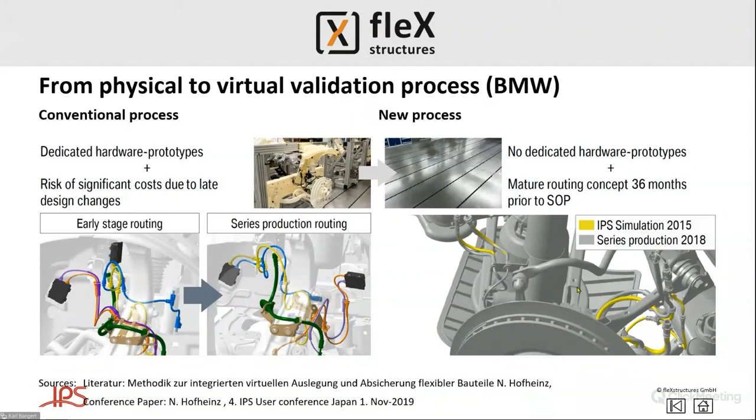So 3 years before start of production, they can already determine where the cables are going to lay out, check for bending radii, clearances, motion considerations, so that once you go to production, you have the confidence that this will be a design that can be manufactured, and also have minimized the risk of warranty costs, which is also a consideration. If you are joining us from the automotive industry, you probably already understand that we've gotten much more complex over the last decades in terms of the content of vehicles, both in software and wiring.

We now have many vehicles that have 5 or more kilometers of wires within the cars, and are looking for ways to reduce cost and weight for that. The major automotive OEMs, both in the US and Germany, are going all in for electric vehicles, for EVs, and the trend is continuing. So the challenge becomes, how do we manage this complex network of communication wires and high voltage power wires? How do we manage the transition to 48 volt systems, which are coming soon as well?

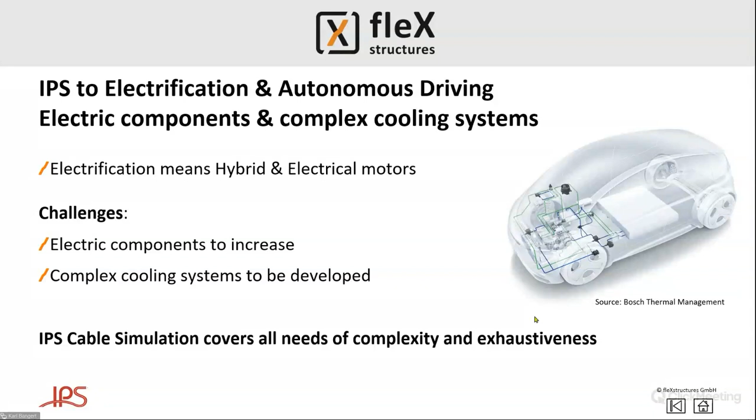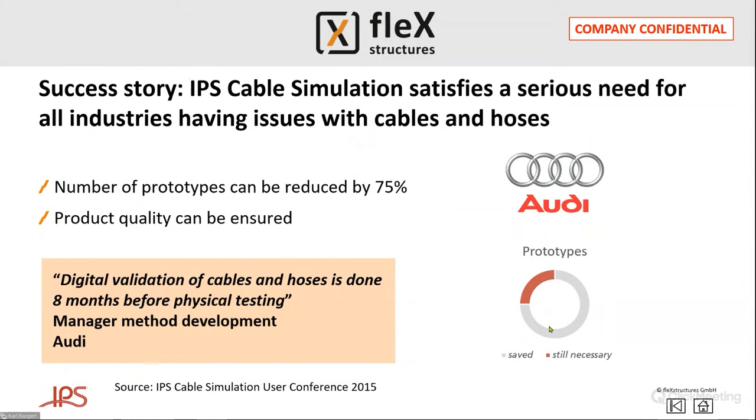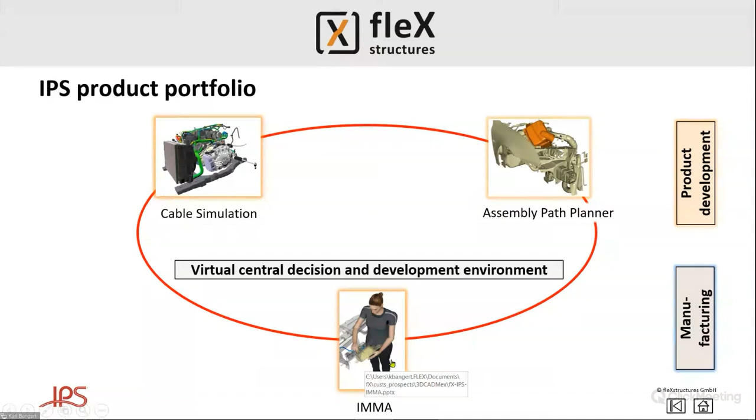In the future, Moises and 3D CAD Mexico, we'd like to continue a series of webinars where we talk about the other solutions in the IPS product portfolio, because we can also assist with assembly path generation, ergonomics and human factors, robotics and virtual paint and sealing, and then have these models available to you in virtual reality as well, so that you can truly understand what your design is capable of in the virtual space, whether it's on the screen or in a virtual environment. So we're going to discuss IPS cable simulation and present that.

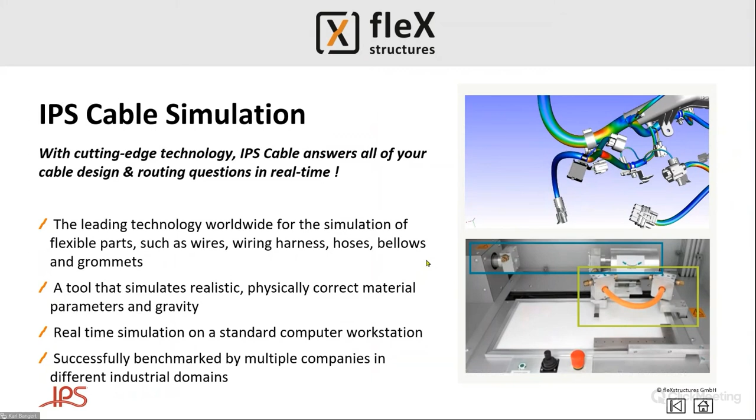So what you're seeing here are movies. These are real-time simulations. That is the important math that was developed 15 years ago and is constantly being improved by the teams in Germany and Sweden developing IPS. It is an engineering accurate solution. We also provide measurement test services so that you can test the bending and torsional stiffnesses of your wires, cables, and harnesses so that you have the confidence, the trust that the simulations that you see are physically accurate and meaningful, and that you can rely on this. In that way, we're doing two things, which is providing you a fast solution and one that's highly accurate.

So whether there are small motions of hoses and cables or sensors, or large motions, these type of things move very quickly and can be investigated very thoroughly with IPS cable simulation. So I will stop talking. This is what we're going to see.

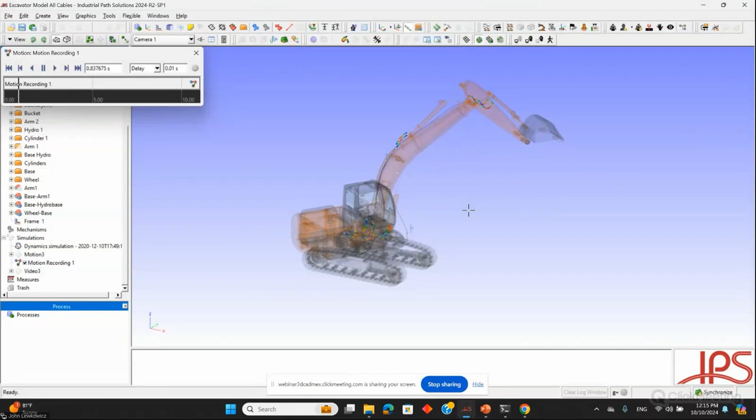So this is one example of what we can achieve in IPS cable simulation. We want to, long before start of production, determine the routings of all of our flexible components so that we can analyze them and optimize them to get the best design very early. So we want to understand the behavior of all of the flexibles in our product, how the product is operating or moving, and then we can investigate and change the flexibles to look at things like bending radii or forces within the flexibles or clearance to surrounding components. Whatever the need may be, we can investigate it in IPS.

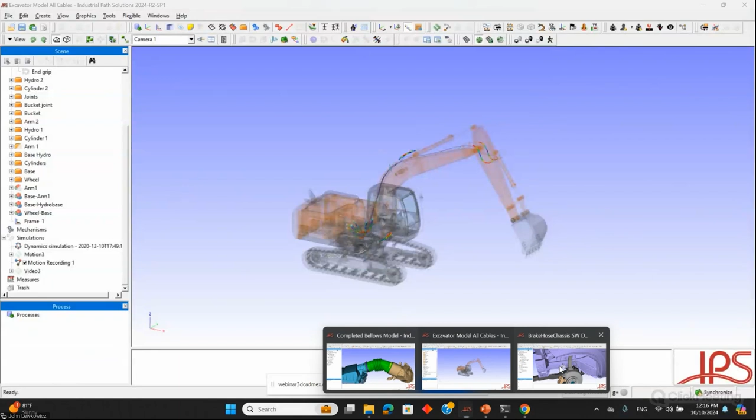Also, keep in mind, this example we're looking at now is of a piece of construction equipment with lots of hydraulic hoses, but the methodology and the simulation technology works no matter what kind of flexible it is. So whether it's a single wire or a bundle or a multi-branch harness or a preformed coolant tube or a hose or even flexible surfaces like bellows and grommets, we can analyze and optimize them in IPS. So we're going to go through a few examples of this today: several different ways that we can create these flexibles in IPS, do our analysis and optimization, and ultimately feed that information back into our CAD or PLM systems.

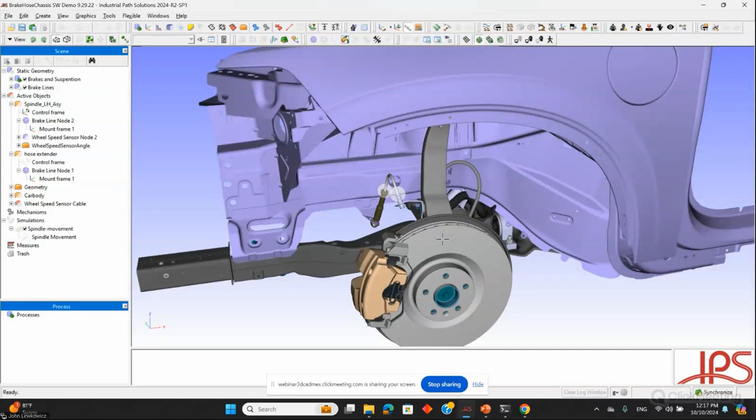So the first way we can do this is with pre-existing 3D geometry. You can see that I have part of a vehicle here that comes from the CAD system, and we can import this directly into IPS. Regardless of the CAD or PLM system that you're working in, we can import that data. We're compatible with a very wide range of 3D formats, including STEP, JT, STL, VRML, and we're also compatible with native CATIA formats like 3D XML, CATPart, CATProduct, native NX formats, and native Creo formats. So regardless of what you're using, we can bring the data in.

In this example, let's say we're interested in the behavior of this brake line here. We want to see how it will behave when the vehicle is in operation. We can simply take this pre-existing 3D geometry and use a tool called the Cable Finder to automatically detect it and make it flexible. You can see the software has found the center line and the cross section of this brake line.

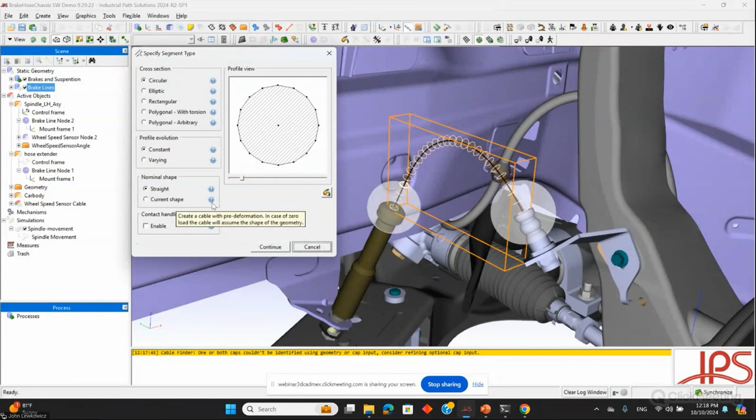Then we just need to tell the software a little bit about this particular flexible: what does its cross section look like, and very importantly, what is its nominal shape? We can model any kind of flexible component. If it's a straight flexible, something that's straight when unloaded, think of just a wire, we can handle those applications. But we can also handle flexibles with pre-deformation, if it's pre-bent into some shape before it's installed, we can simulate those kinds of flexibles as well.

Next, we need to tell the software just a little bit about this particular flexible. We have several options here. We can define some basic material properties: density, Young's modulus, and Poisson ratio. As Carl mentioned, for extremely accurate and in-depth studies, we offer testing services to determine these exact effective mechanical properties, so length density, bending stiffnesses, tensile stiffness, and torsional stiffness. We can also use one of the flexibles that comes with the library of flexibles that you get with IPS. In this case, I'll just select this brake hose 10 millimeter and hit OK, and then create cable.

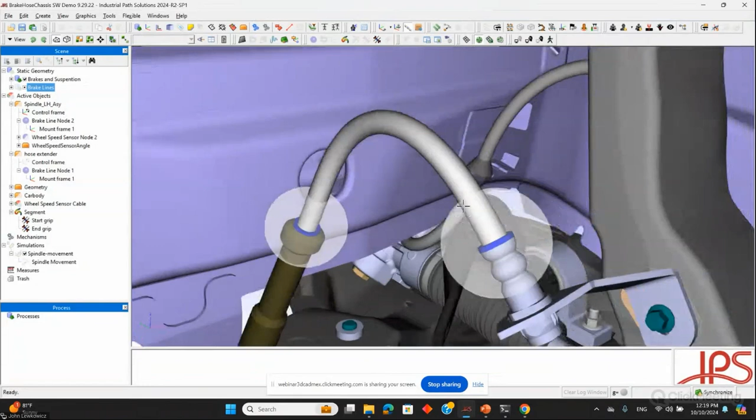You can see that quickly, I now have this flexible in IPS. As was mentioned, the software is very, very fast and interactive, so we simulate in real time. As we make changes to the environment or move the flexible, we see that behavior immediately. So it's very, very fast and interactive.

Now, obviously, we want to understand how it behaves when the vehicle is in operation. So for that, we will need a motion. We already have a motion loaded in here, so we can see this spindle moving up and down. There are many ways we can get the motion. We can create it from scratch in IPS. We can also create very complex mechanisms in the IPS tool if we have multiple interdependent joints in the mechanism.

But we can also directly import this motion data from your CAD or PLM system so you don't have to recreate it, and that's what we've done in this case. Now the last thing I need to do is attach my flexible to my vehicle, so that's just a couple quick clicks in here. Oops, give me just a moment.

I attached to the wrong one.

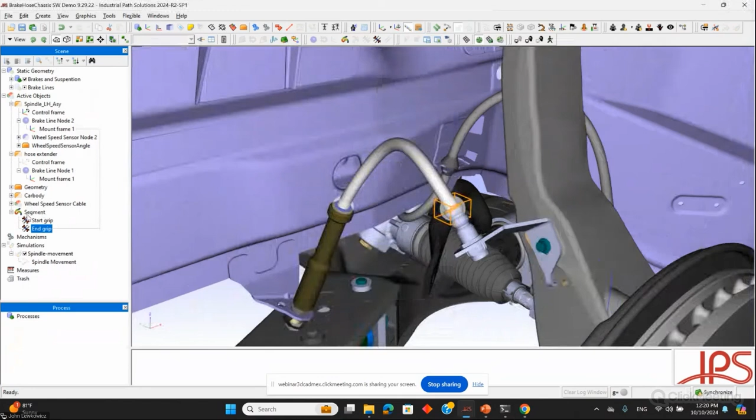There we go. And then we'll just unwind this, so we start with a torsion-free solution. Now our brake line is connected to the vehicle. And if we click play on the motion, we immediately see it moving and we see its behavior in real time.

We can see immediately that there are some problems with this routing and this design, right? Our brake line is far, far too short. And in reality, we would break it and there would be brake fluid all over the place. So this is obviously a problematic design.

But beyond just observing how our flexibles look, there are many interesting ways we can analyze their behavior. First of all, we can create visualizations, basically color maps on the flexible, to look at any number of different things. So we can look at stripes to look at torsion, a number of different forces, moments, stresses, as well as the bending radius.

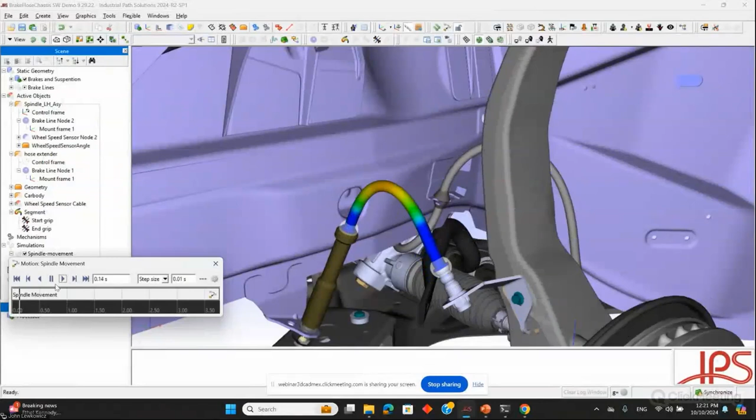I'll create a color map for the bending radius, and we can customize this color map based on our design requirements. So let's say a bending radius of 100 millimeters is very good in this case, and our minimum is 25, that's our minimum. We can apply that map and again see those changes in real time. So we can immediately see, we have some problems here.

Beyond just visualizing these forces and bending radii and all these different things we may be interested in, we can also create value measurements, directly measuring different properties of the flexible. So we can look at things like elongation, again, a number of different forces, moments, stresses. I will just create a value measure here for the bending radius. Anything we're measuring will come up in the bottom of the screen and be tracked in real time. So again, as I play through, we can see how that value is changing over the course of the motion.

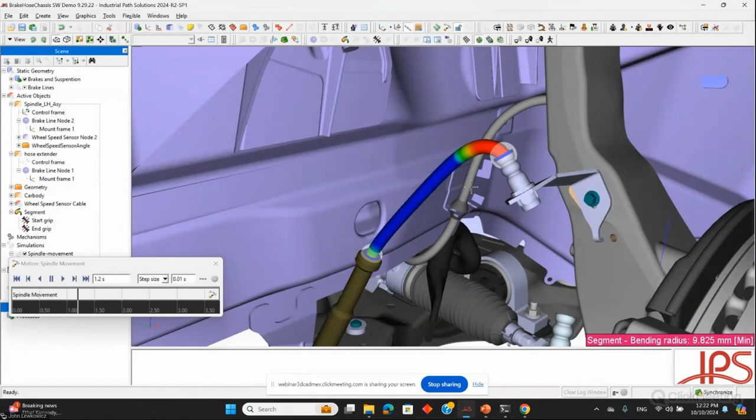Now again we can see there are some problems. And in IPS we can very quickly, with just a few button clicks, make changes to this design. So we could change the routing, we could change the length, whatever we need to do to make this design comply with our design requirements. So in this case, possibly adding some length is going to improve that minimum bending radius. You can see it changing here in the bottom right corner of the screen.

That's sort of a manual way to take a look at the behavior, but we also have some very powerful analysis tools. So if I go to my motion, I can analyze over the course of that motion and take a look at how those values change over time. So for instance, if I map my bending radius here, I can create a plot of that bending radius over time to see how it's changing.

Just a moment here while it generates the plot for me.

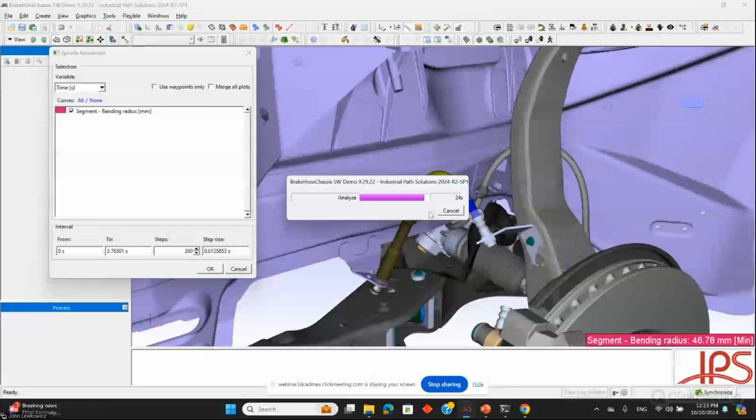Yeah, and as you were saying John, it's interesting you're changing the length of the wire in real time as well as the attachment points. Which is really the benefit - you're working with something like you're working with your hands.

Yes, absolutely. So now we can see how these values are changing over the course of the motion, and we can do lots of interesting things with this analysis tool. So we can drag through to see the behavior at different points in time.

We can do things like establish a minimum threshold. So we know our minimum bend radius is 25. We can put that value in here, and the graph will identify for us all the areas where we're violating that requirement. So we can see it's quite a lot that we're falling outside of our design requirements.

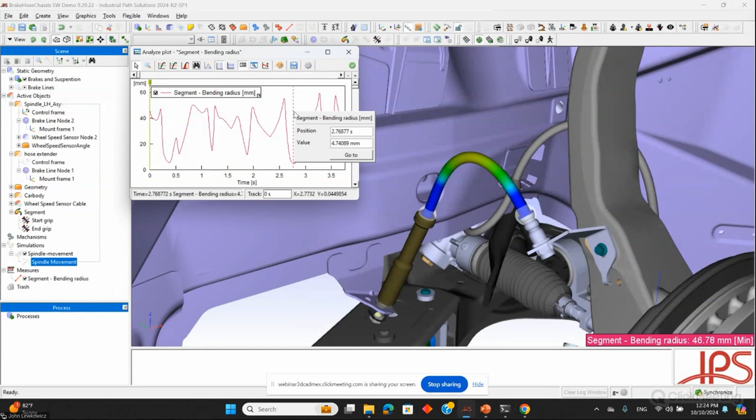We can also do things like search for different values, so we can look for global and local maxima and minima, or specific values. So in this case, if I search for the global minimum bending radius, I can find that, and this is my worst case scenario over the course of the motion. We can see the value is about 4.7 millimeters, which is really very terrible.

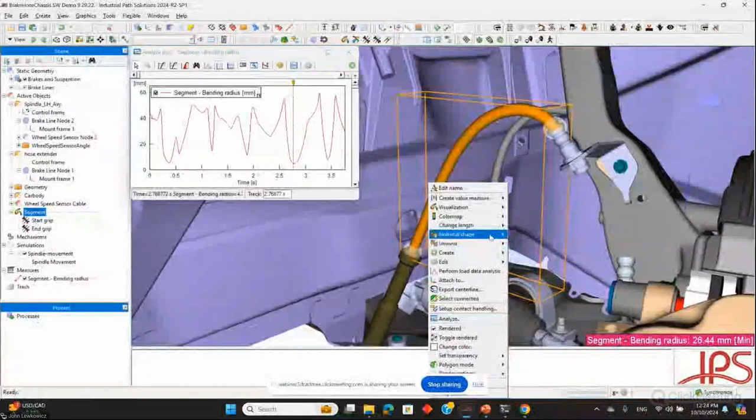And then we can simply add some length here or change the routing, whatever we need to do to make this design feasible. So I'll just keep increasing the length. I can see my minimum bend radius is changing there in the bottom right corner of the screen. And it looks like at a length of about 220 millimeters, we are above our minimum requirement.

So now that we've made these changes, we can simply click this green check mark to save those changes to the simulation, and the updates are done very, very quickly. We can play back through our motion and see the behavior of the flexibles. Again, we're simulating in real time based on the presence of gravity and the material properties that are unique to each of these flexibles. For instance, the wheel speed sensor cable on this side behaves a little differently than our brake line on this side.

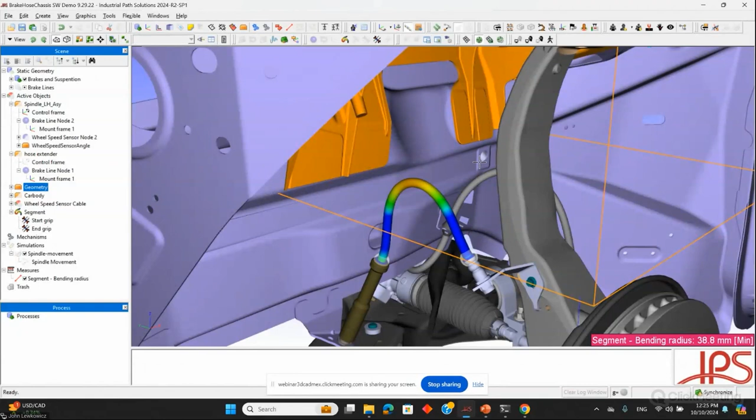So this is looking pretty good in terms of the bending radius, but we do have a much longer flexible now, so we may now be concerned with clearance to some of the surrounding components. Maybe I'm worried about the clearance to this trim here. We can also create measurements to measure the minimum clearances between any components.

In IPS, I just tell the software what I want to measure from and what I want to measure to, hit OK. And again, anything we're measuring will pop up in the bottom right corner of the screen in real time. So as we play through, we would see the behavior, see how that clearance is also affected.

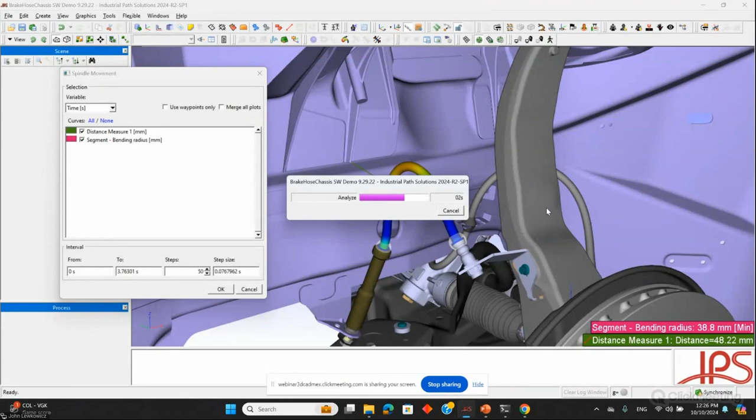But again, we can create plots of these values. So again, if I just go to my analysis tool, I can create plots of each of these values over time. And we can see how each of them are behaving.

So on the bottom is my bending radius. Once again, I'll just search for that minimum value, and I can see my minimum bend radius is 27.5, so I'm doing well there. And let's look for our minimum clearance - our minimum clearance is about 26.5 millimeters. So I think this is acceptable.

And we can, again, just click the green check mark to save those changes to the scene. You can see how quickly we were able to create, analyze, and optimize this routing in IPS in just a few minutes.

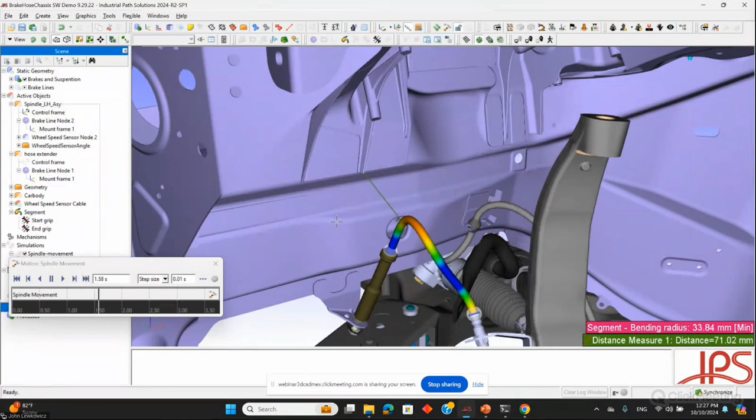Now, what do we do with this information? We've come into the tool, done our analysis and optimization. We want to save this information and feed it back so other designers and engineers are aware of the changes we've made. There are several ways we can do that.

We can export just the center line. If I right click on any flexible in the scene, you can see there's an export center line option. We can also export any 3D geometries in the scene, so if I want to capture the CAD for something including my flexible, I just select what I want to export and go to File, Export, in a number of different CAD formats.

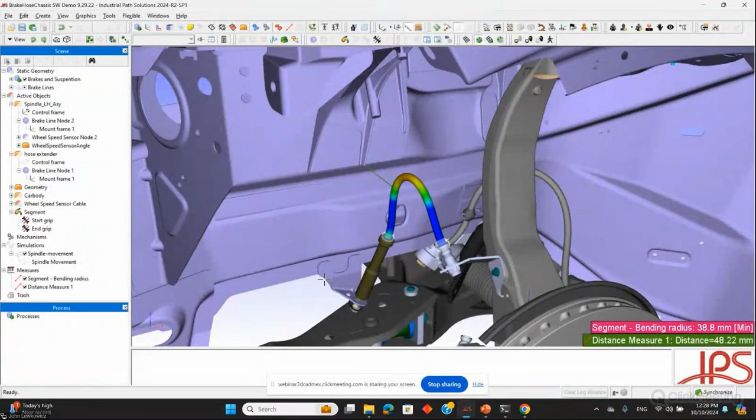Again, just about any option you could want is available. And then we can do some other very interesting things to feed this information out. First, we can create motion envelopes, capturing all of the space that this flexible is going to move through while the vehicle is in operation.

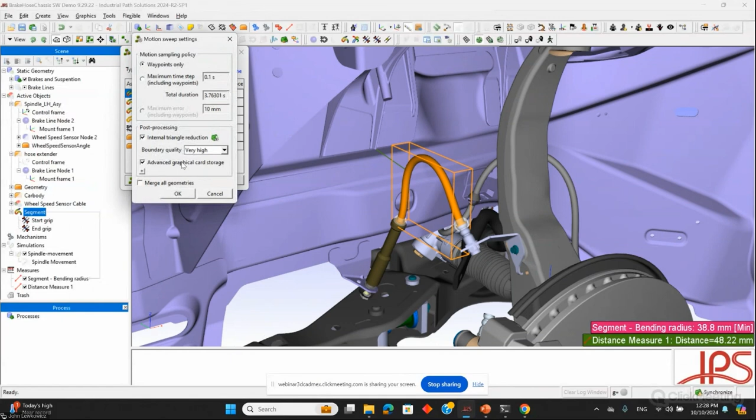To do that, we'll just use the motion volume tool. All we need to do is tell IPS what we want it to include. In this case, I'll just include my one segment here. Let me check my settings, and we'll generate a swept volume for that flexible over the course of the motion. So here's that swept volume.

Again, we can export this out in any format you want. We'll take a look here. If I make it a little transparent and change the color, we'll see that our flexible is not going to go outside of this volume we've generated, and we've captured all the design space it will be moving through. This can be a great way to allocate design space and let other designers know not to put any other components in this swept volume. This is the path we've planned for our flexible to move through.

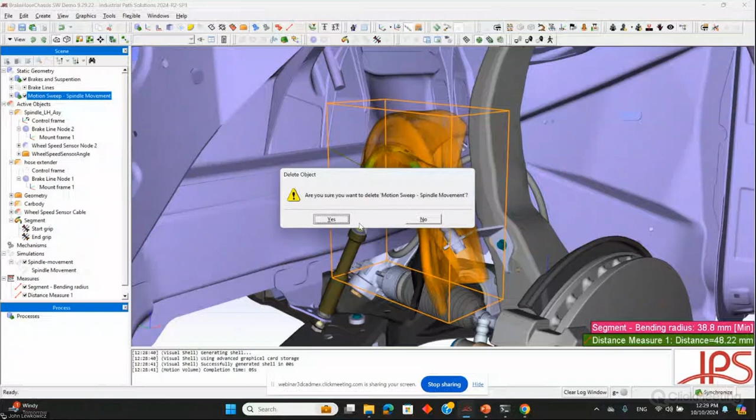So far we've been looking at everything in a nominal way, right? We've been looking at things with nominal length, nominal position and orientation of the fixation points, nominal material properties, but we can also allow anything about our flexibles to vary. For instance, if we use the tolerance tool, we can create tolerance envelopes for anything in our scene.

As a simple example, we could allow the length of this brake line to vary, let's say plus or minus 10 millimeters. If we hit generate, the software will generate a volume that takes into account the tolerancing of our flexibles. We can do this with or without motion, whatever is most useful to the user.

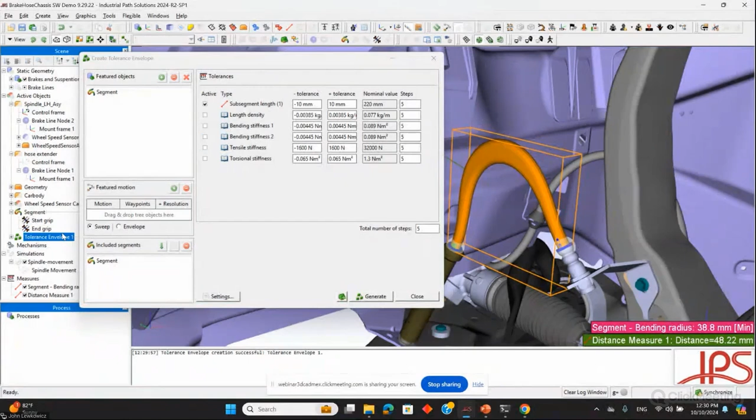We can also allow things like the material properties of the flexible to vary, and again allow the fixation points to vary. A very common check is when we align this brake line to this fitting over here, it's possible for the orientation of the fitting to vary a little bit, and we can certainly allow that to vary.

In that case, we could do the position or orientation. The orientation about the fitting would be rotation about the z-axis here, and I'll put in a large value so we can see the difference. If I hit generate, it will do plus or minus 10 millimeters, as well as plus or minus 25 degrees about that fitting. We can see we get this much larger swept volume that captures all of the space that could be taken if we allow that variance.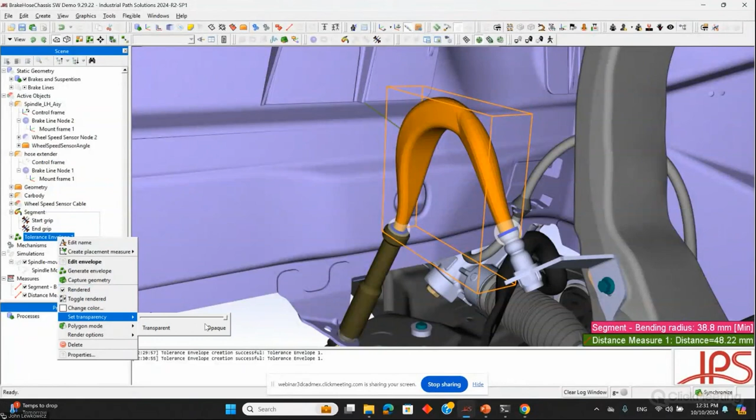Are there any questions so far, Carl?

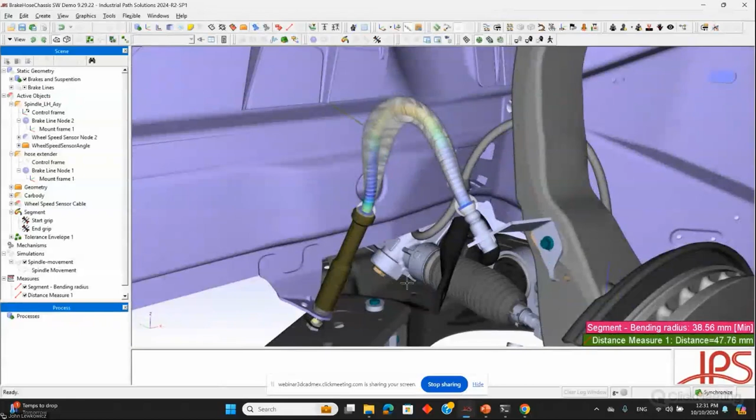Yeah, so gravity is taken into account. All we need to do is activate it. If I go into my settings here, we can just turn the gravity direction to whatever direction is down in our model, so in this case it'd be -z, and that gravity is taken into account. Again, based on the material properties of these flexibles, how they're routed, where they're fixated, all of that is taken into account in a very physically realistic way.

Okay, as it relates to multiple flexibles, there's a lot there.

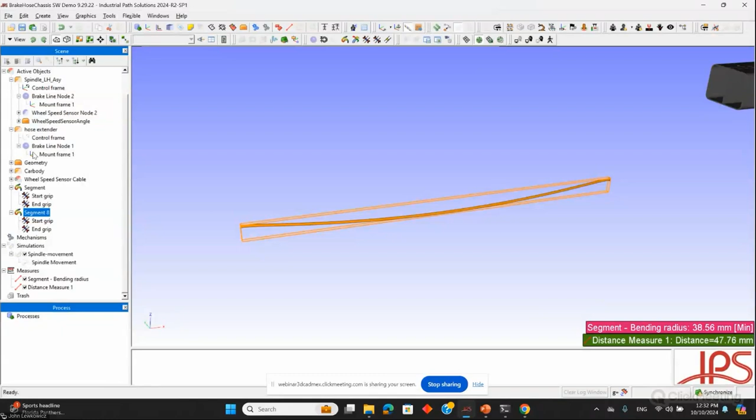So first of all, we can connect together any flexibles that we need to create multi-branch harnesses. And we can also take a look at the interactions between flexibles. So for instance, I just made this wire here. And if I make a copy of it, I can then activate what's called contact handling between multiple flexibles.

So if I tell the software that I want contact between these two, hit apply. Now, if they touch one another, that interaction will also be calculated. So if I pull the end of this one up and move it over here, we'll see them actually pushing on one another. And again, this is all done in real time. You see this very realistic twisting behavior.

And then for instance, if we were to pull the ends together, we'll see them have some even more interesting kind of twisting behavior, right? And all of this is taken into account. So obviously, contact between flexibles is not ideal, but there are cases where there may be contact, and we want to take that into account.

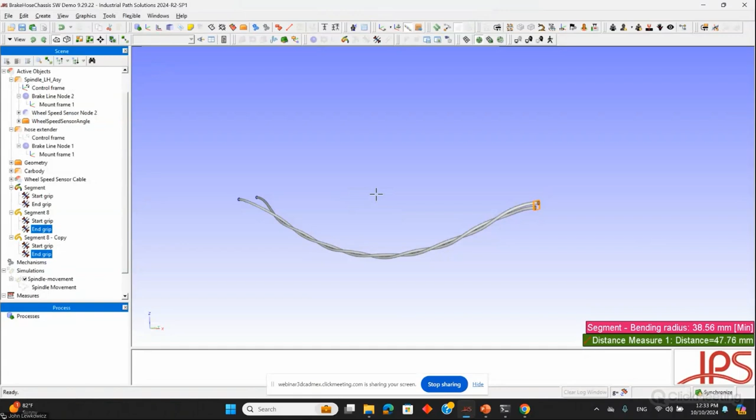John, I think the question was also related to the bundle editor and how we treat, let's say, a harness in which the individual wires may be made up of different diameters and different properties. Yes. So a few things on that. We can string together any number of flexibles to make a multi-branch harness. And we can do that similar to how we did the brake line with pre-existing geometry.

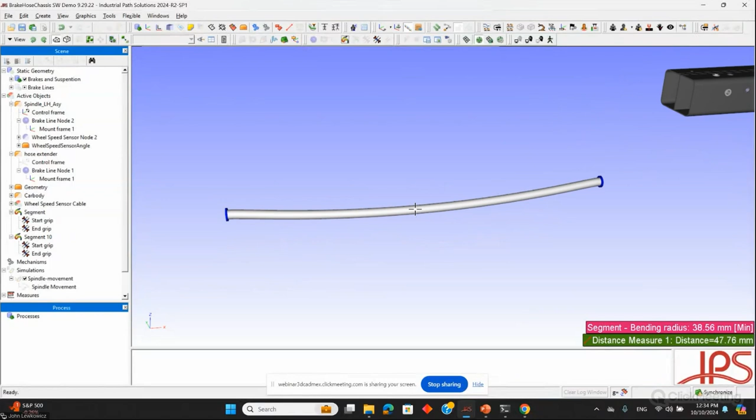If you have a model of your harness, we can just take the whole harness, make the whole thing flexible, and attach all these various pieces together. We can also, I'll show you here, make a harness from scratch. So if we have some segment of a flexible, and then we want to add a branch into this, all we need to do is tell the software where the branch is going. So in that case, I've just created this little node, which in IPS is a fixation point.

And then there's a tool directly in here to create a branch. We just tell the software where along the length of this main segment we want the branch to be. We can drag or define some value, and then we tell it where we want it to go. So in this case, I'm going to have it go to this position here. Let's say this was another connector. And then I can select which component I would like to use, and we create a branch.

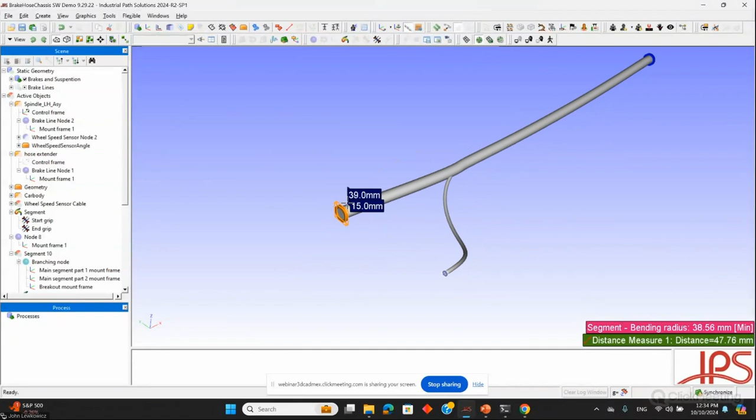And then the interactions between these two branches are taken into account. So if I move one end, we'll see movement in the other piece. If I move this piece, we'll see movement there. So again, this is a fairly simple example of this multi-branch model. But again, you can add as many branches as you need.

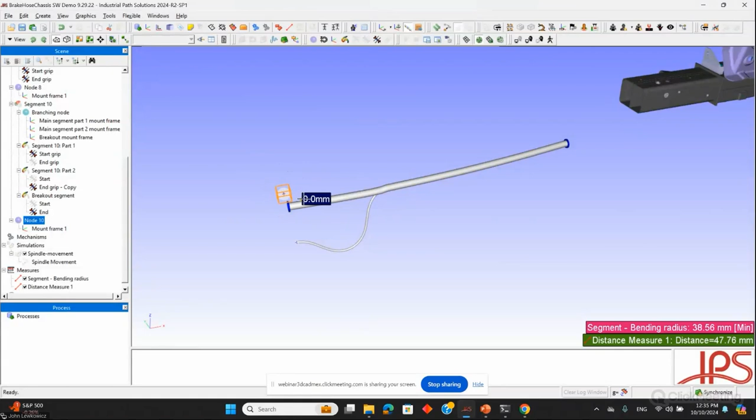So if I wanted to create another one, again, I would just tell the software where I need that branch to go, and then create an additional branch. Tell it where that's going, and then tell it which flexible I'd like to use. And in this way, we can string together as many flexibles as we need to get that very realistic behavior of our wire harness.

Carl also mentioned bundles. So we can estimate the material properties of each of these bundle components, right? Obviously, they're made up of different combinations of wires, and we want to take that into account so that we get a very physically correct and realistic result. For that, we have a few tools, one of which is the bundle properties estimator, where we can tell the software which wires make up this bundle, and it will estimate for us the stiffness values of the overall bundle itself.

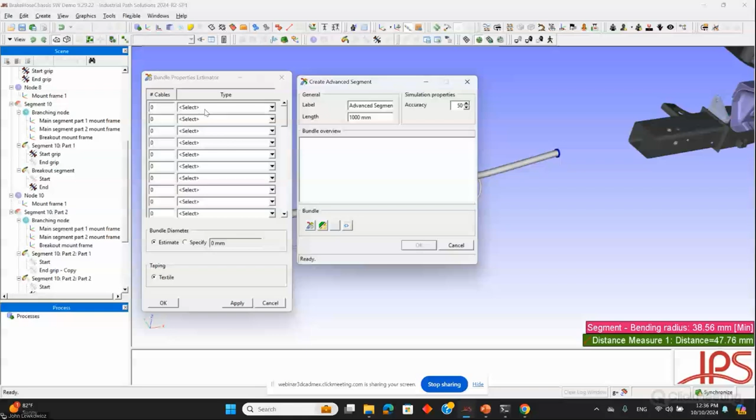So if I go in here and I just add in some different wires into my bundle and then hit apply, it shows me an estimated cross section. How big do we think the diameter of this would be? And then it shows me what the material properties of this are. Oops, hold on, where is it?

View bundle properties. So we can see this estimation of the diameter, length density, bending stiffnesses, torsional stiffness, and tensile stiffness. And then we can save this back to a library of flexibles that we can continue to use. And if you hit OK, it makes that flexible for you, and you can attach it to your product, use it in the simulations in whatever way you need.

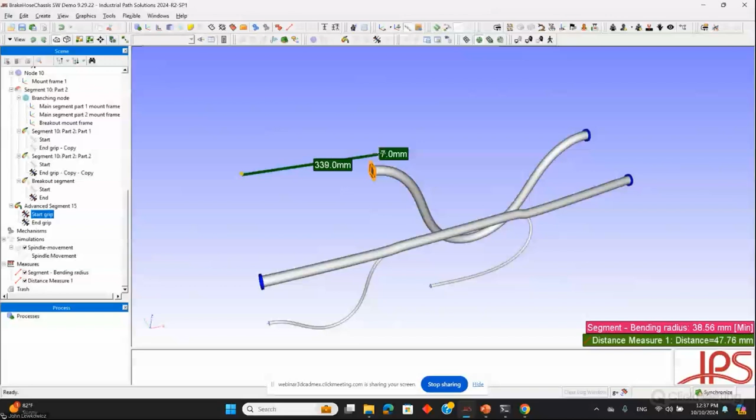I hope that helps a bit with the wire harness and the bundle questions. Were there any additional questions from the team?

Okay. I don't see any right now, so please carry on.

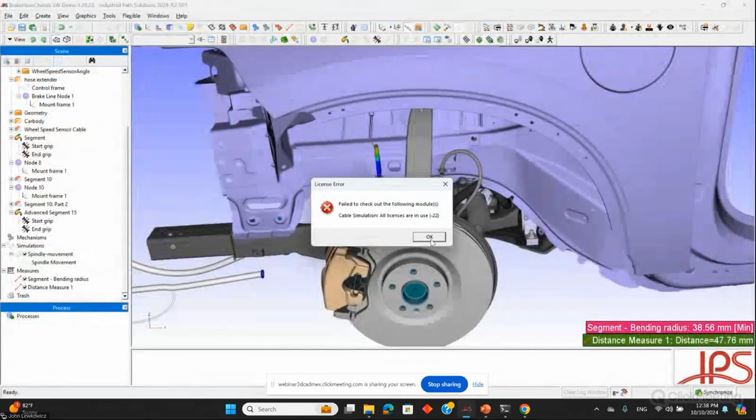Sure. So in this example, we took a look at how we can make these flexibles from pre-existing geometry, do our analysis and optimization, and then feed that information back into our CAD or PLM system. But we can also create flexibles directly from scratch in IPS. So let me just restart this session and open up another model. Give me just a moment.

And we'll take a look at how we can route flexibles from scratch with no other information. Sometimes we may not know what the routing looks like, or maybe we would prefer to do this work directly in IPS rather than in the CAD system, so that we get the physically correct behavior with the presence of gravity, correct material properties, all of that. So in this case, we'll go through an example of routing a wire.

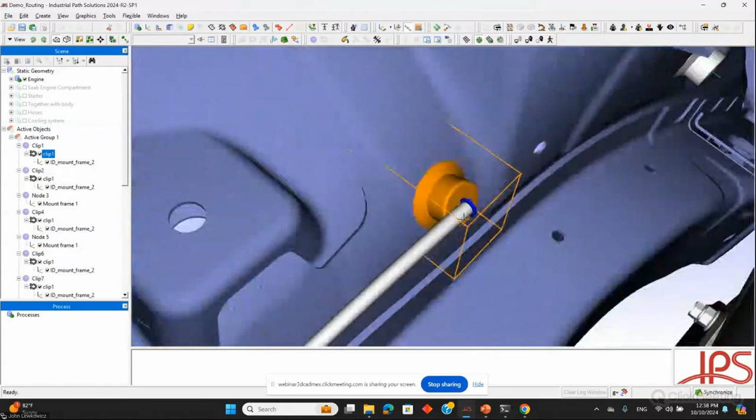So you can see we have this engine bay here. And all that we've done in this example as pre-work is define these fixation points. We've just placed these at each location where we want the wire to run through. You can see each of these fixation points along the length here. This is where we want our cable to flow. These are all of the points we want it to go through.

So if we know where we want our flexible to go, we can use a tool called the cable router to tell IPS to automatically find us a way to get from here to here, flowing through all these fixation points. All we need to do is select the points that we want the wire to run through, and then use the cable router to route a flexible between all of those points. The software is giving us a preview with these red arrows and this white line showing how the wire is flowing through each of these fixation points.

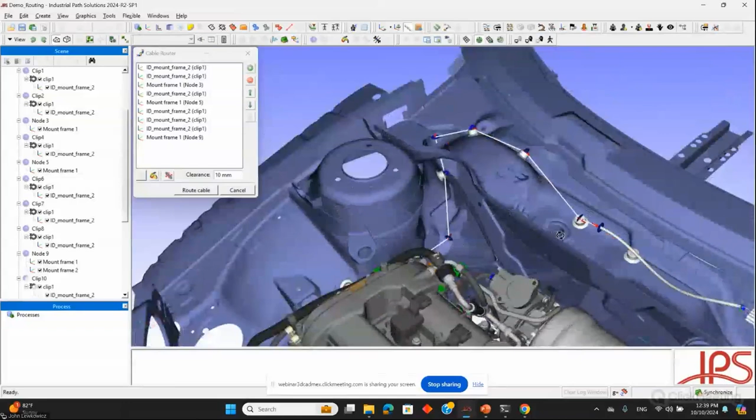From there, all we need to do is tell the software a couple of things. We can unwind the initial routing. Usually we want to start with a torsion-free solution, so we'll select that option. Then we define a clearance value. If we know the radius of our routed cable, we would input that here, and up to that radius, the routed cable would not collide with anything else in the simulation. Then we just hit route cable, and if there is a solution, the software will find it.

This calculation could take anywhere from a second to a couple of minutes, depending on the number of fixation points, how complex the surrounding geometry is, how tight the surrounding clearances are, basically how hard it is for the algorithm to find a solution. But you can see it found this solution very quickly. Again, we would pick a cable or define the material properties for the cable we want to route here. I'll hit OK. And we have our wire routed just like that in just a few minutes.

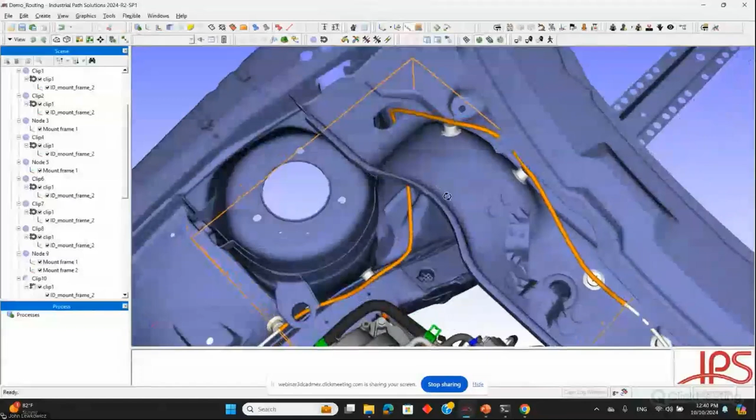And now from here, we have the same set of analysis and optimization tools available to us. For instance, we could do a visualization. I'll do the bending radius. Customize this based on our requirements, so maybe in this case, 100 is good and 20 is our minimum. We can immediately see all of the problem areas along the harness. It looks like we have an issue here and we have an issue here.

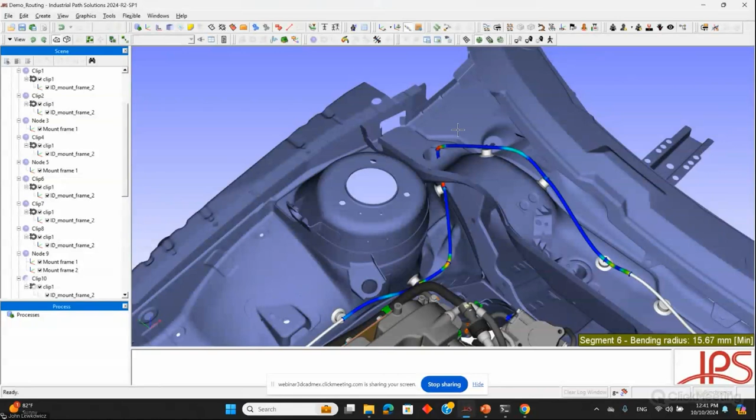Similarly, we can directly measure anything we're interested in for the flexible. I'll measure the bending radius, and we can see this is the global minimum bending radius along the length of this flexible. From there, we can begin to make changes to optimize our design and make it compliant with our design requirements.

So again, we can do things like playing with the fixation points. I have this clip here. Maybe if I try to rotate it some, that looks like it's improving the bending radius in that area, and we're above our minimum in that area.

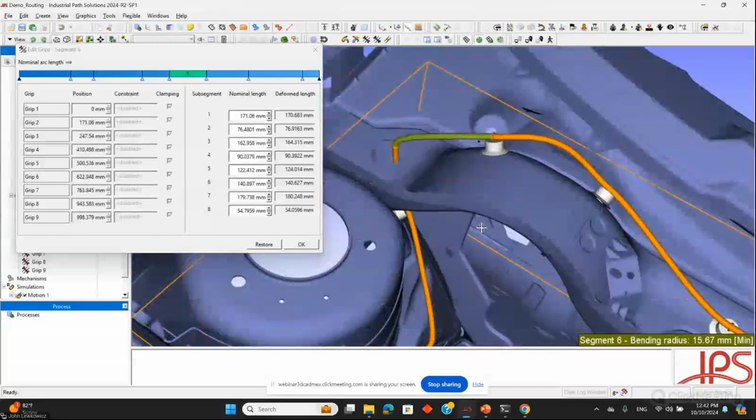And then we can edit the length, either the total length of the wire, or the length in each sub-segment, basically the length between each of these fixation points. You can see that list here. I just need to find the area I want to change, which is up here in sub-segment 5. Then we can increase or decrease the length or type in some value, and we see the bending radius value changing in real time.

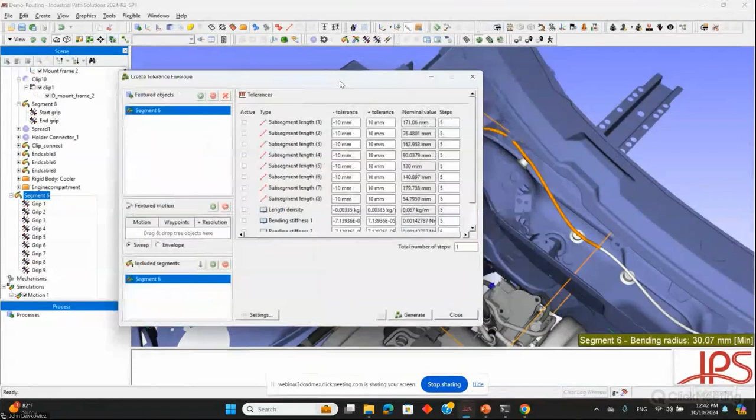So if I go to a length of 130, it looks like I'll be well above my minimum, and I can hit OK to save those changes to the scene. We have the same capability to export out the center line of the flexible, its 3D geometry, anything we see in the scene. And again, we could also use that same tolerancing tool to create a tolerance envelope that allows different things about this flexible to vary. So the same capability, whether it's a motion analysis or a static wire, we can certainly simulate and optimize whatever your flexible needs may be.

Any additional questions from the team? Yeah, John, can we show all the different extensions we can import? Yes, absolutely. I can share a list of them with you if you'd like, but it's extensive, right? So as I mentioned, STEP, JT, VRML, STL, the native CATIA formats, the native NX formats, the native Creo formats. Yeah, there's quite a large table that I can share with you. Okay, thank you.

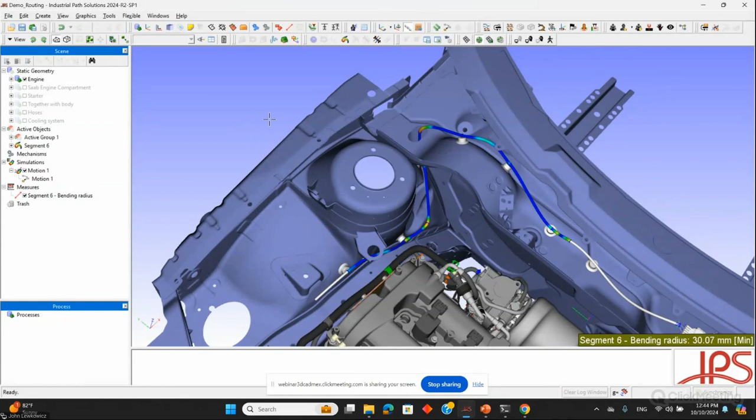Any other questions? Yes, we can simulate temperature along the wires. So a couple of things there. There's a few ways we can deal with temperature. The testing services we offer can also be done at a given operating temperature or pressure. So that would allow us to understand what the material properties of a flexible are across a wide range of pressures or temperatures. The other way we can do it to get an idea of how the flexibles will behave when they're at a given temperature is, again, using the tolerancing tool to allow some of these

stiffness values to vary. So typically, as something gets warmer, its bending stiffness will be lower. As it gets colder, its bending stiffness would be higher. And one way to look at that is by allowing those bending stiffness values to vary within some range. So for instance, if I activate both of those in my tolerance envelope and hit run, we can see where there's a large effect. And you can see along the length of this flexible we just routed, it doesn't make a big difference along most of the length.

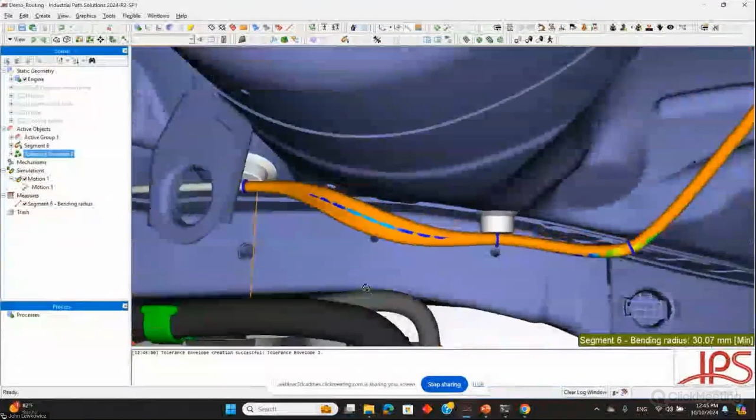But in this area here, we do see a bit of a change, which could affect our clearance values or how the flexible is going to operate when the vehicle is in operation. So that's another way that we can take that into account. But often it's allowing these stiffness values to be different. They will be different at different operating temperatures or pressures, and we can take that into account. Okay, thank you. Any other questions from the team?

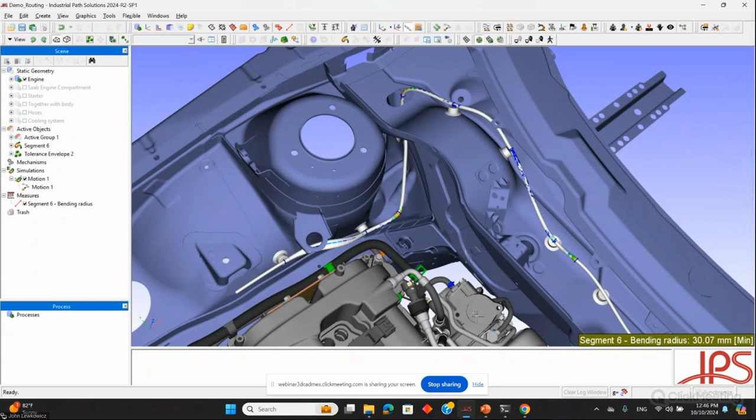Moises, there were some questions related to CATIA V5 and V6 formats for the electrical harness workbench. Did those get answered adequately? Oh, yeah. Okay. Yeah, I think we'll share the list of compatible file formats, not just the geometry formats. We'll also share the list of compatible motion formats as well. Okay, yeah. I have another question.

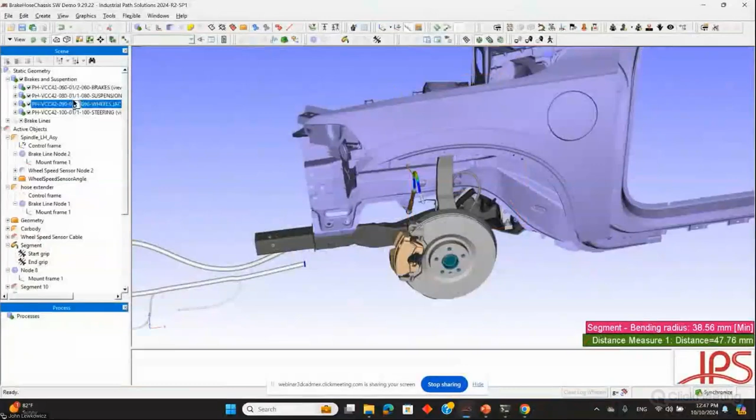When you import a product, a model, you can maintain the links with the kinematics information, right? So for that, it depends on the CAD system. What we will definitely see is the same structure. However the geometries are structured in the CAD system, that same tree structure will come into IPS. So here you can see the way this vehicle is broken up into these different groups with other subgroups, that will be maintained. For each CAD system, as far as motion and kinematics go, we have different ways of bringing that motion data in.

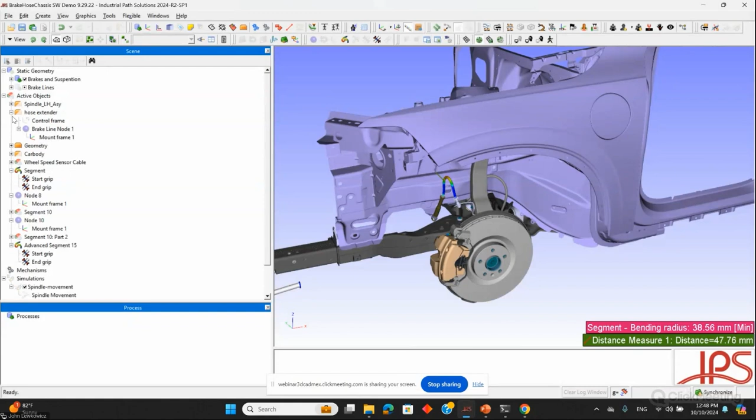So for instance, for CATIA V5, we can very easily import a VFM or a VFZ file, which just brings in the motion, and then we bring in the geometry. And then all we have to do is drag and drop. So you saw at the start of this, our geometry was not linked with the motion, and we would follow the exact same process. We would take that CAD, drag and drop it onto the motion, and just hit OK. And then it will play appropriately.

For some other formats, some other CAD systems, we've developed ways to bring the motion data in. And I think we'd be interested to see how you're creating it and how we can bring it in. But in nearly all cases, yes, we can import in the motion.

Okay. Sorry, John, the CAD is V5 or V6? So for CATIA V5, we can directly import in that VFM VFZ format. For CATIA V6, we've developed a work instruction on how the user can export the motion so we can import into IPS. So unfortunately, the direct export option for VFM or VFZ was eliminated between CATIA V5 and CATIA V6, but we do have a method to bring the motion data over.

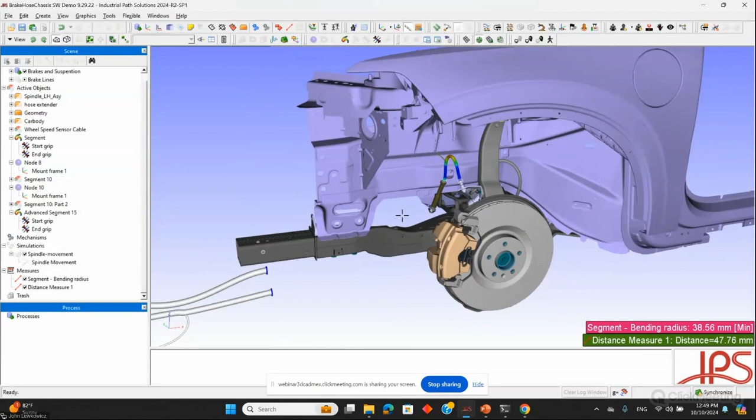Okay, thank you. We have the other one with CATIA V6. We're using the 3D XML format for the branch. Are you saying, can we use 3D XML? Yes. That's actually quite a new development. As of this year in IPS version 2024 R2, we added the capability to import 3D XML formats. We know that's important to our users, and we just recently added that feature to IPS. So yes, we can import in 3D XML.

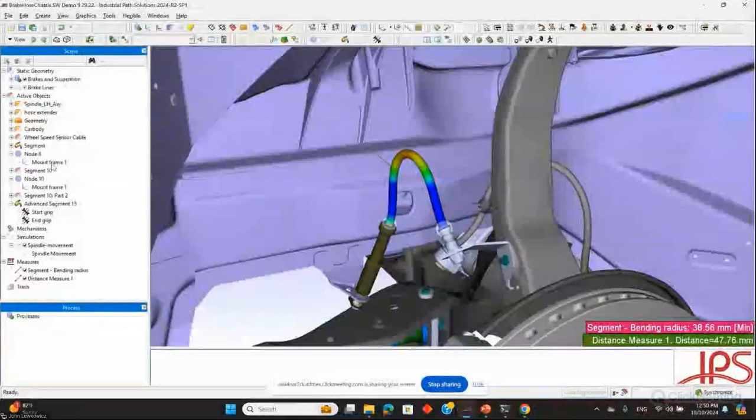Yes, how to determine how many cycles until the material can fail. Okay, that's a great question. So we do have some tools to look at durability. This is an ongoing research topic; we cannot yet tell you the exact number of cycles to failure, but what we can do is a generalized durability analysis for a given routing. We've used this extensively for some consulting projects, and it works very well for comparing one design to another.

So we use a tool we call load data analysis. Here we go. If we just right click on a flexible, we see this perform load data analysis option. When I click that, the software automatically does a calculation in the background, taking the motion into account. Even though nothing is moving here, it's looked at the motion, and it determines this LDA max damage value. We call it pseudo damage. It's a unitless measurement of how likely the flexible is to be damaged.

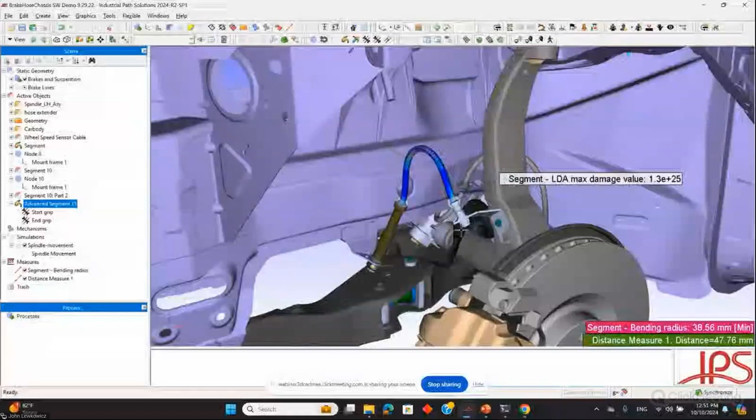And it also gives us a color map along the length here. Let me get rid of my, okay, cool. It identifies where the damage is most likely to occur. In this case, it's right where the flexible goes from this rigid fitting into the more flexible brake line. And we can see based on the color map along the length where we're most likely to experience damage.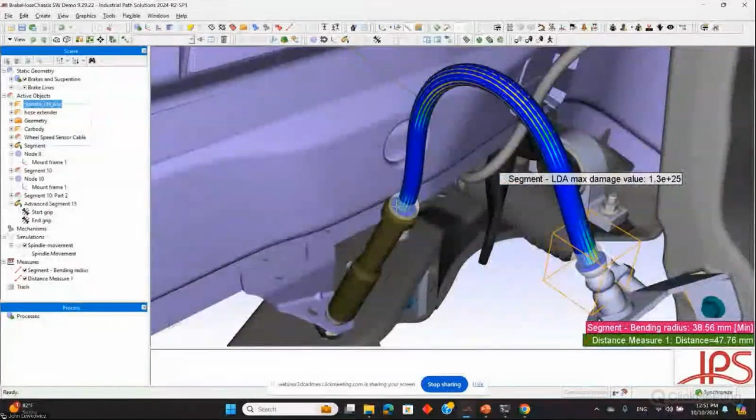The way we typically use this is to compare one routing to another. For instance, if I take this flexible and make it longer, or change the routing in some way, I'll add another 20 millimeters, so 240 instead of 220. And I rerun that LDA, we will see the difference between the two routings and can compare them.

So the top value here is our LDA pseudo damage value at a nominal length of 220. And this is our pseudo damage value at a nominal length of 240. So this tells you that the length at 220 is more likely to fail than the length of 240. And we can use this to analyze different routings, different lengths.

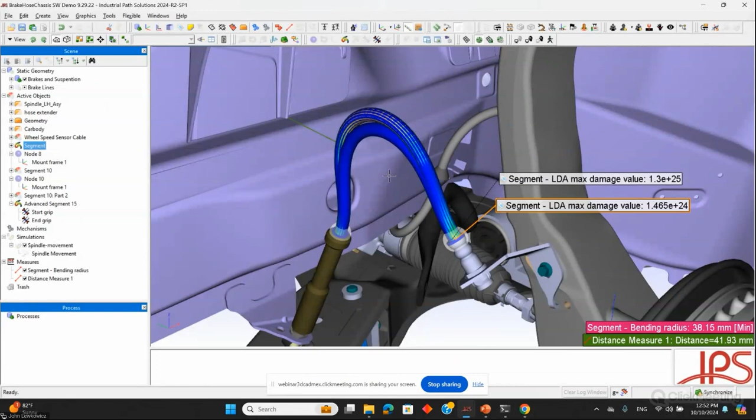Similarly, I can move this fitting and the end of my brake line comes along. If I rerun it once again, that will give me another value to compare which is the best. And from there, we can determine the optimal design that will have the best durability and go with that routing.

And we are hoping in the next few years to have the capability to directly calculate the number of cycles to failure. It's a very tricky mathematical problem, so there is ongoing research in that area, but you can certainly do comparisons between different routings right now. Yeah.

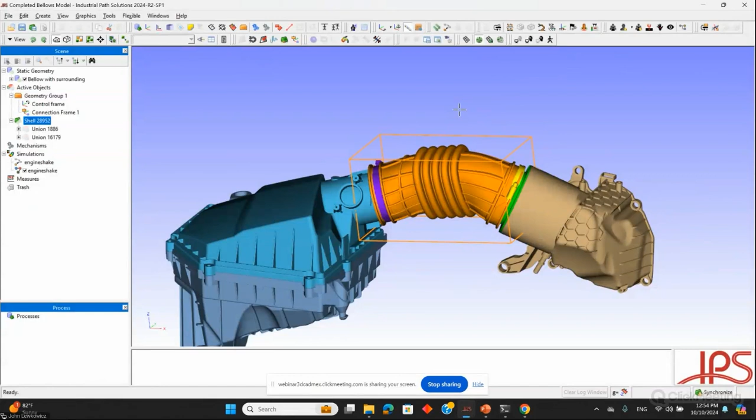There is one last thing I just wanted to show quickly here, which is our capability as far as simulating flexible surfaces. So we've seen how we can create wires or hoses or multi-branch wire harnesses. We can also simulate complex flexible surfaces, so things like bellows and grommets. This is just a simple example of a bellows for an air intake.

And we can certainly simulate these kinds of flexibles as well, where we see the behavior of that surface, how it's deforming over time. And we have similar capability to measure a number of different things on these surfaces. So we can measure displacement, von Mises stress, the bending radius, curvature, or contact force. And we can also measure those forces.

If I turn on the connection points, we can measure the forces on the clamps here, so what we would call a union, where it's actually being fixated. We can calculate reaction forces and moments there as well. So this is a very interesting tool for those who are maybe simulating things that are not a wire, but more of a flexible surface type component. Very, very cool tool that works very well.

Okay. Any other questions? No.

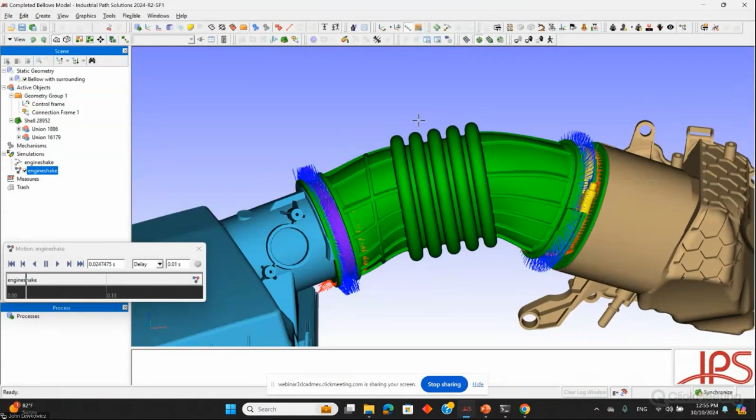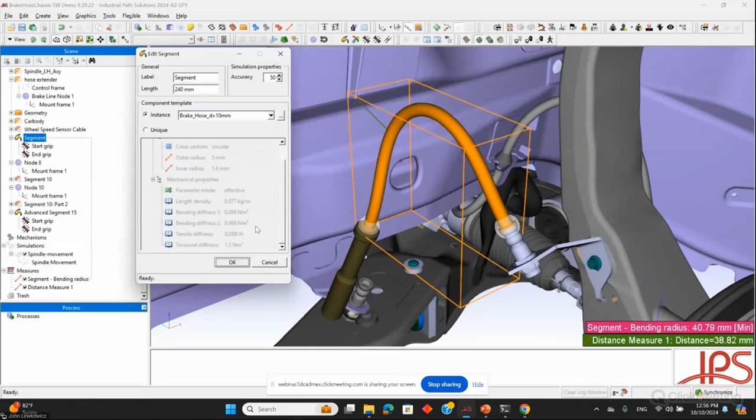Yeah. So the way that we simulate flexibles in IPS is we take into account the material properties of a segment or a section of the flexible, right? So we can take the taping or the sheathing into account when defining these material properties. And then in the example of our wire harness that we made over here,

we can have different material property values across the length. So if we understand the taping strategy for the flexible, what it looks like, we can either estimate the stiffness values or, again, provide direct, exact material properties through physical testing. So there are several options there.

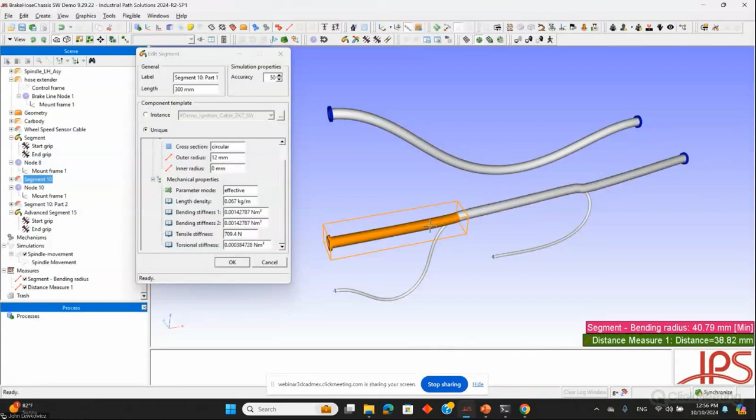I guess the thing to consider is that we're looking at the bundle or the flexible sort of as a whole, which gives us a very quick and accurate result. We're not necessarily calculating what's happening in each individual strand or each individual wire within a bundle. We're looking at the bundle at more of a macro level so we can get that fast and interactive result.

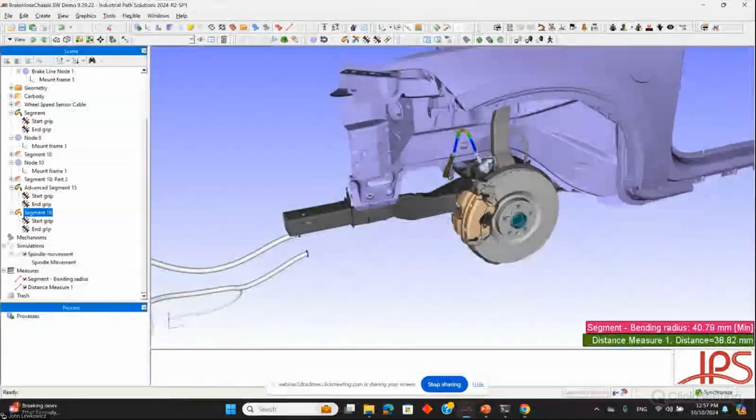Yes, and in this way, we've also simulated various types of coverings, right, to prevent collision between cable segments, and there's ongoing work to model that. Is it worth mentioning some of the clips and connectors that are available in the 3 minutes we have left? Yeah, absolutely. So let me see if I can add one here.

I don't know if I have the database ready, but we can define or add flexible clips and connectors into a simulation. Basically, you can just right click and add it into some fixation point. And then from there, you can just define any degrees of freedom that you have on the clip or connector. So if it's able to translate, rotate some amount, we can certainly take that into account so that you get that very realistic simulation of your clips and connectors.

So whatever degrees of freedom they have. I don't think I have the clip database loaded here. I do not. Sorry, I wasn't ready for that one. But yeah, we can certainly take those kinds of things into account in the simulation and define whatever the custom properties of your clips or connectors are.

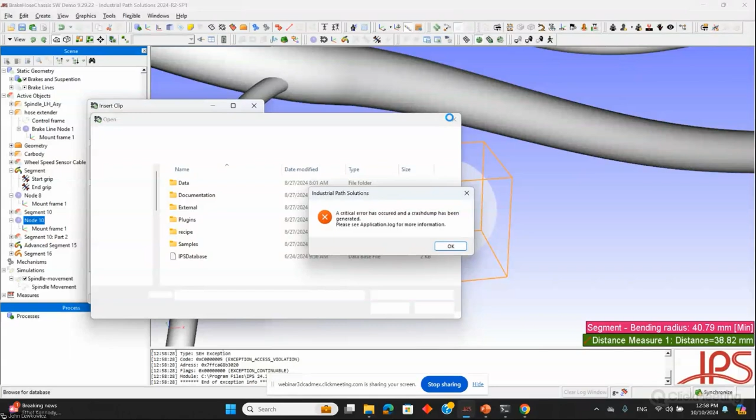Great. It got mad at me when I did that, but yeah. You can pull up a different window. Yeah. Excellent. Thanks, John.

And we have a question about safety factor value for hose design. I guess something like a safety factor would be a company internal consideration. So I think that would be design guidance that you would get from your OEM, from your customer. But those types of heuristics, those types of guidelines can be built into IPS as well.

Yeah, if we can figure out what you would like to measure, again, there are many options as far as the analysis. So if we have a way to define the values we're interested in, we should be able to measure them in IPS.